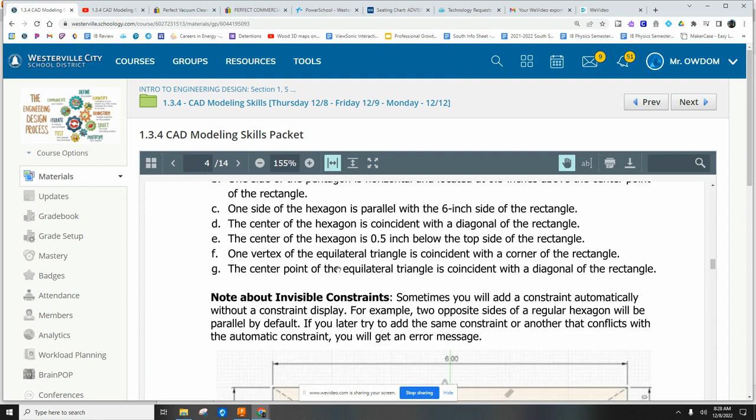So this PDF is the instructions that kind of go through the entire thing. This video will go through page 1, page 2, page 3, page 4, page 5, 6, 7, and that's it. So basically the first half.

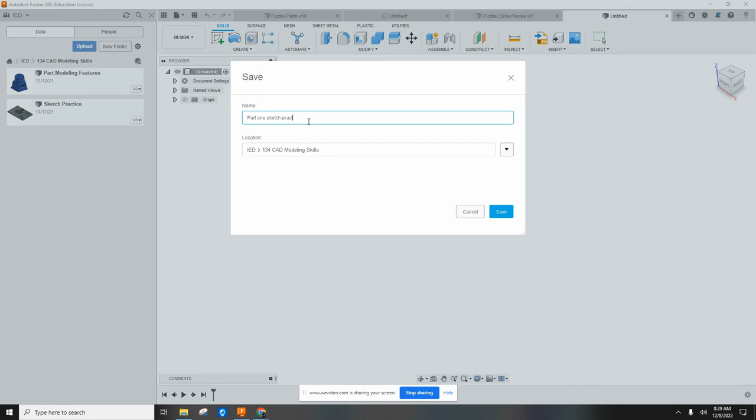All right, so what we're going to do is we're going to go to Fusion. We're going to make a new folder that is 134 CAD modeling skills. Then we are going to make a file in there, and we are going to save it. We can say part 1, sketch practice. All right, so hit save.

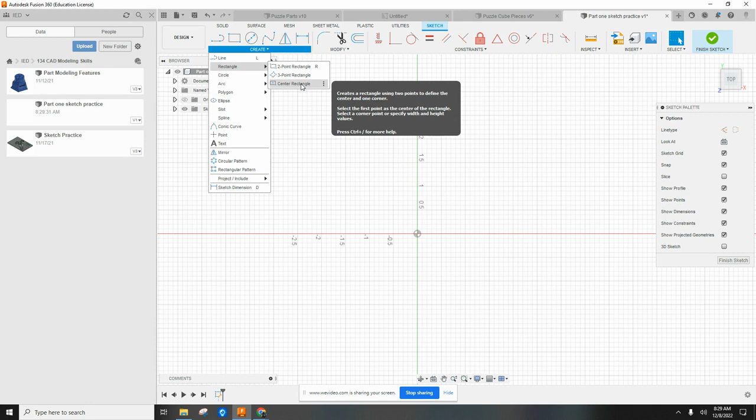All right, so we are going to make a sketch in the middle, and we are going to make a center rectangle. So we go to rectangle, center rectangle, click the origin, bring it out to 6 inches wide, tab 4 inches tall. Enter.

All right, so do not finish sketch. We're going to do a lot of stuff within this sketch. So make sure down here you only have one sketch, and make sure you're within this sketch. Do not make a new sketch, new sketch, new sketch, new sketch, or you might have to redo it.

All right, so now what we are going to do is we are going to make some polygons. So we are going to go to create, and we're going to go to polygon. There's circumscribed, inscribed, and edge. So it all comes down to how they are dimensioned.

So circumscribed, if you see it, basically there is a circle within the polygon, so the dimensioning is to the sides of the polygon. Inscribed is the circle outside - the dimensions measure out to the points of the polygon. Then edge polygon, the dimensions are the sides of the polygon.

All right, so we're going to make a circumscribed polygon. Do not make it on this line, just make it up here. We are going to make it so that it's 0.35, and we are going to hit tab and have a 5-sided polygon. All right, so hit enter.

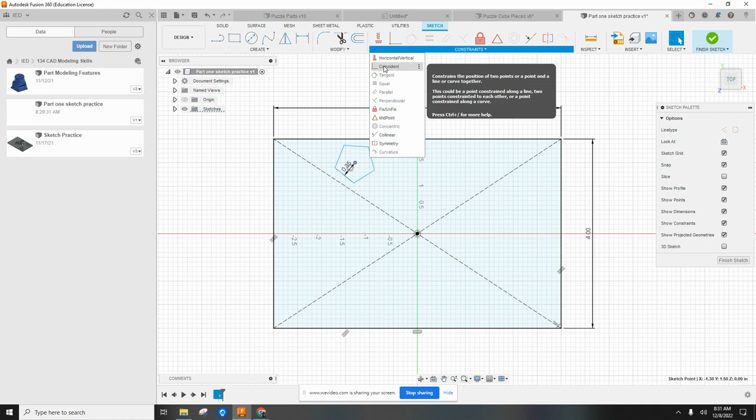All right, so if you, we learned about geometric constraints yesterday, so this should be able to move freely right now. If you made it on this line, this would be connected to this line by a coincident constraint. And if that's the case, we'll have to delete it.

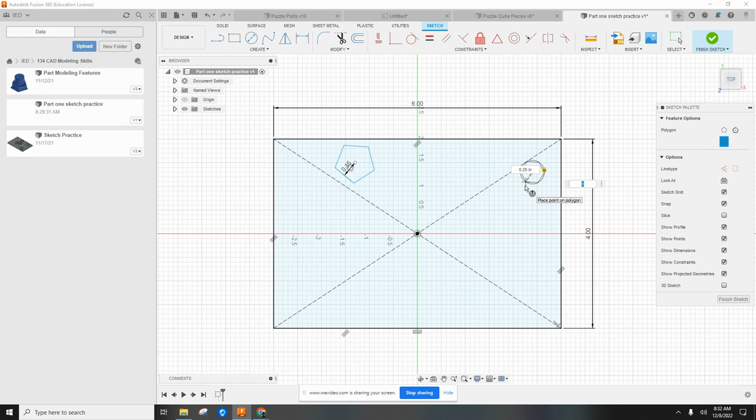All right, so then our next step is to make another polygon. We'll do an inscribed polygon this time. We are, again, not going to put it on this, but we're going to bring it over here. It's going to be 0.25, and it's going to be 6-sided. All right, so we'll hit enter. So I have a 0.35, 0.25.

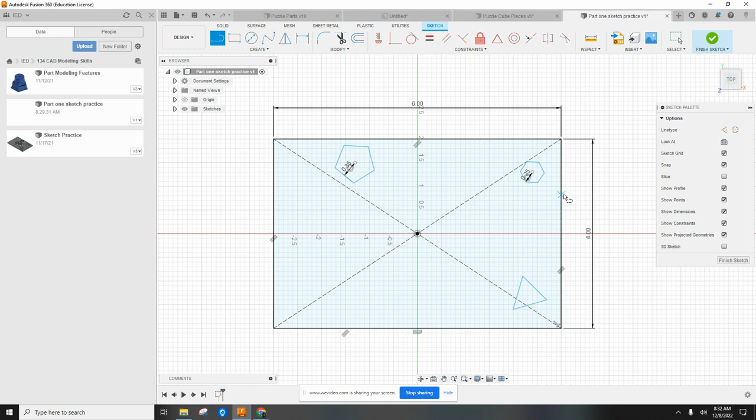Finally, we are going to make a triangle over here. You can just use the line tool if you want. We're going to make a line, line, line. This is a great opportunity to go up and use the equals geometric constraint. We can click, click, and then click, click to make an equilateral triangle.

Then we will go to dimension and make this triangle of 1 inch. So if you're looking in the PDF, there's a slight mistake. In the drawing, it's 1 inch, and then it tells you later that it's 1.25 - it's fine to just make it 1 inch. All right, so make sure you're clicking the right dimension. All right, so something that looks like that.

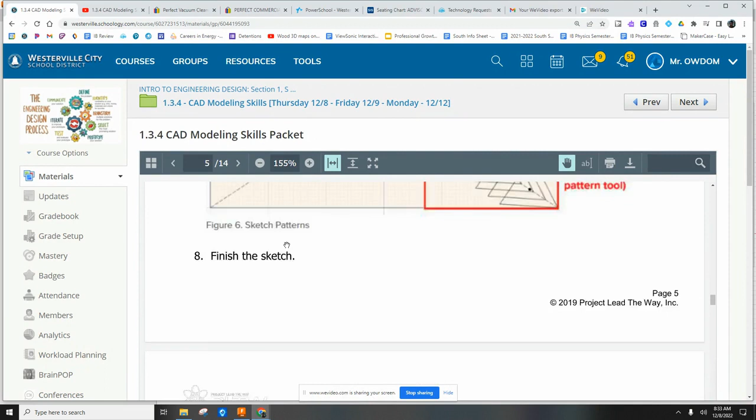All right, so now what we are going to do is we are going to do a decent amount of geometric constraints. So we are on page 4 of the packet. If we look at this packet, we are now on page 4. We've gotten through 3 pages already. All right, so we're basically on to this one. This one by far will take the most amount of time.

All right, so we are going to do A through G right here. We're going to try to read it, try to understand it, and then try to apply it. So the center of the pentagon is on a vertical line through the center of the rectangle. One side of the pentagon is horizontal and located 0.5 inches above the center point of the rectangle. Basically, we're going to have to do at least 2 constraints right here.

So we go over here. We have to attach this to a center line, but notice there is no center line right here. So step 1, within this sketch, we are going to make a center line. Now, useful practice is to realize that we can go over here to construction lines and make our line a construction line. Basically, that will make it dashed, and it will only help with our geometry. It will not allow us to build anything with it.

All right, so we're going to make a vertical line from here to here and a horizontal line from here to here. Okay, now we're going to go up to constraints, and we are going to go to coincident constraints, and we are going to go and click the center of this one and this line. So we know if we have a coincident constraint that forces this dot to be on this line.

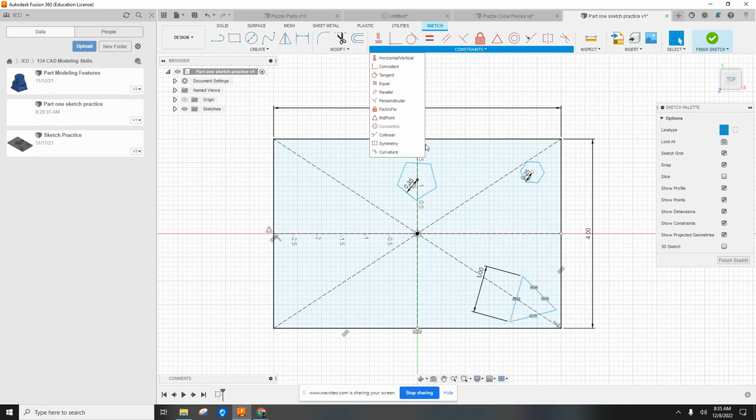All right, so we can try to use the horizontal constraint and see what happens. Remember, horizontal constraints sometimes confuse things, because it's horizontal and vertical, so it might flip. So we'll try. I'm going to click this line and see if it goes to the horizontal. And it did. It worked fine.

If for some reason yours does not, you can hit escape and go in and click that constraint and hit delete. And then what you could do is you could do a parallel constraint with this line and this line, or any horizontal line. And that would force it to become here.

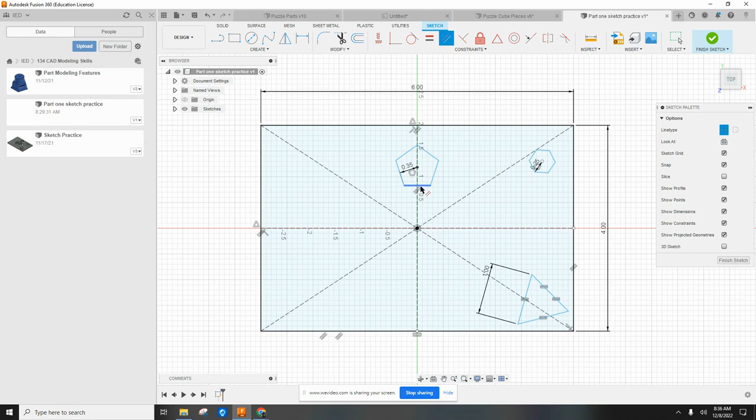So both would work. All right, so now what we have is we have this that can move freely up and down, but it is forced to be in this direction. Last but not least for this shape, we are going to go to dimension, and we are going to dimension this from here to here, and it is going to be a distance of 0.5. So from the center origin to 0.5. All right, we got that one done.

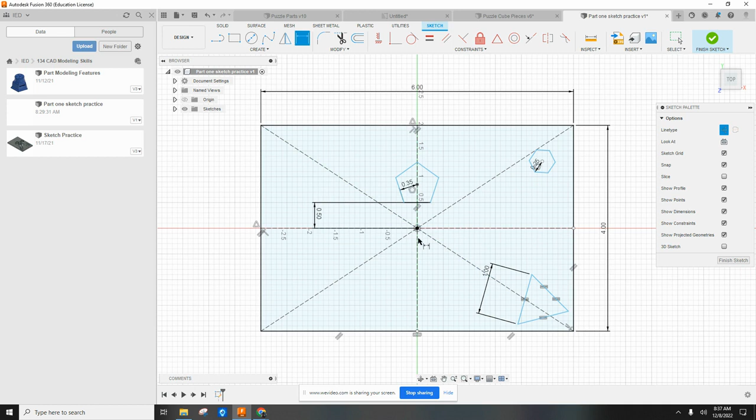All right, so let's look back at our list. We did A and B right there. Now C: one side of the hexagon is parallel with the 6-inch side of the rectangle, and the center of the hexagon is coincident with the diagonal of the rectangle, and the center of the hexagon is 0.5 inches below the top side of the rectangle. All right, so we got 3 things to do here. Okay, so we have this.

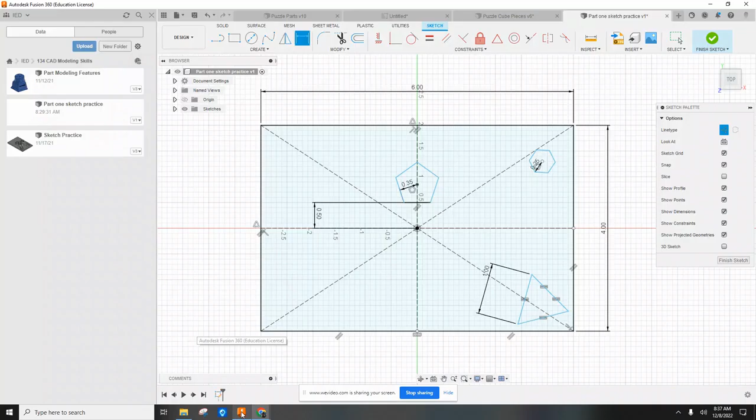We are going to go in and we are going to click parallel, and we're going to click this line and this line. So now we have a side parallel with this. Then we are going to go up to constraints and we are going to hit coincident, and we are going to click this diagonal line and this dot. All right, so now if we hit escape, we should be able to move this up and down, but notice this is parallel with this the entire time, and this slides along here the entire time.

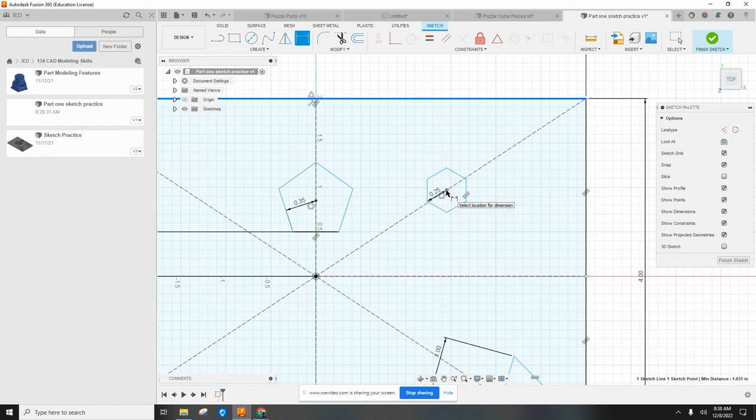All right, so step 3 is the center of the hexagon is 0.5 inches below the top side of the rectangle. All right, so we go back here, we go to the dimension tool and click this line and this line. It is 0.5. All right, so if we do that, that is done. Boom, boom, boom.

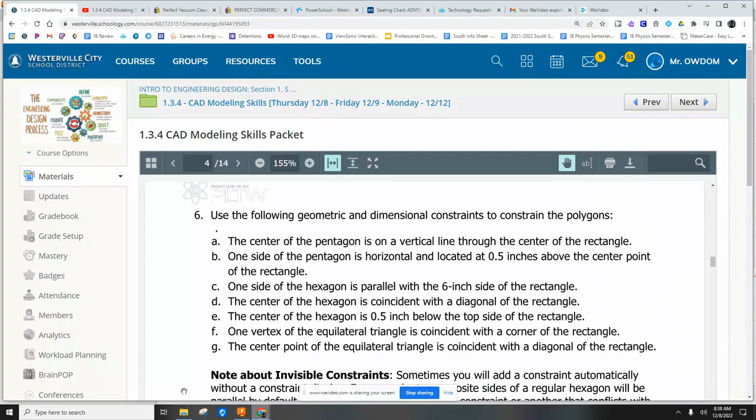All right, now back to our instructions. One vertex of the equilateral triangle is coincident with the corner of the rectangle. The center point of the equilateral triangle is coincident with a diagonal of the rectangle. So we got 2 coincident constraints that we have to do.

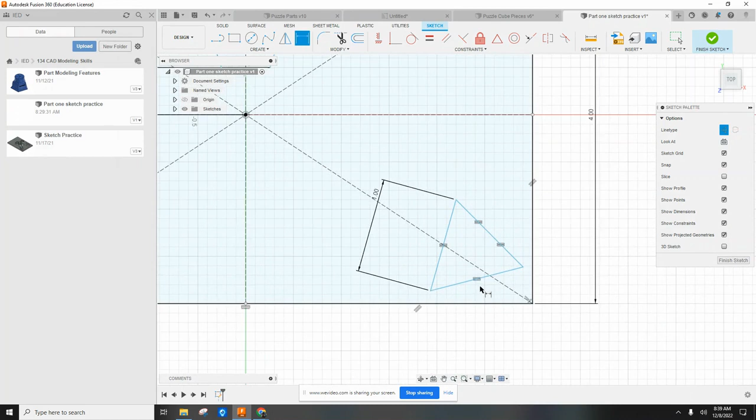So go down to our triangle. Now what we have to do is make a coincident constraint, a point to a point. Then what we want to do is find a midpoint. So we can use the midpoint constraint. We can click this and this.

Oh, it didn't work, I thought it might. So now we can see what we can move here. We'll click escape. Can we move this? We can move this up and down. Other than that, we could make this perpendicular.

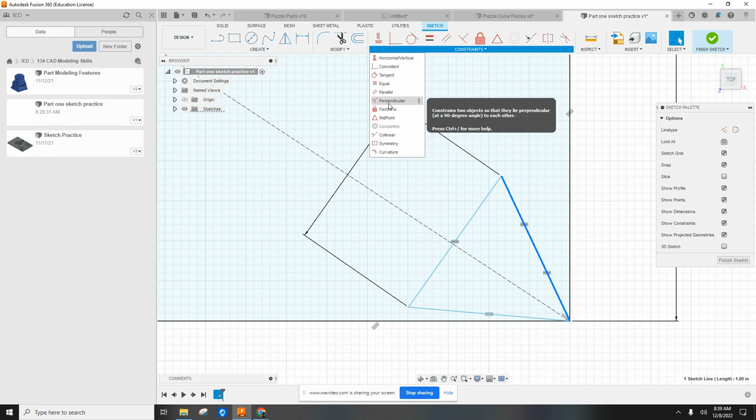So we could click this, Control Z. We could click off. Make this perpendicular to this, and that would be the midpoint right there. So that would be okay. You could click that or that. We could do a lot. There are other ways to do it as well, but that would be fine.

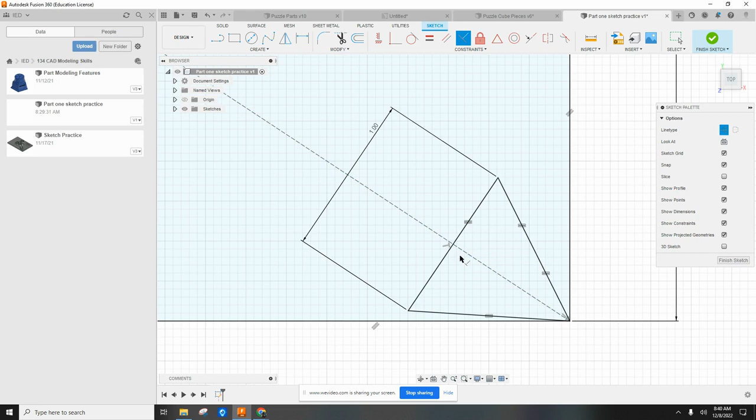So the center point of the equilateral triangle is coincident with the diagonal. Yep, so it should look something like this. So you have this right here, and this right here.

Reflection question: is your sketch fully constrained? How can you tell? If you look at this, if they are all black lines, they are fully constrained. Notice how this, though, is not all black lines, so it is not fully constrained. There are some constraints, but it's not fully constrained.

All right, now we're going to work on the pattern function. We are going to create 3 patterns. We are going to use a rectangular pattern with this, a circular pattern with this, and another rectangular pattern with this. So we are going to go through and estimate these a little bit.

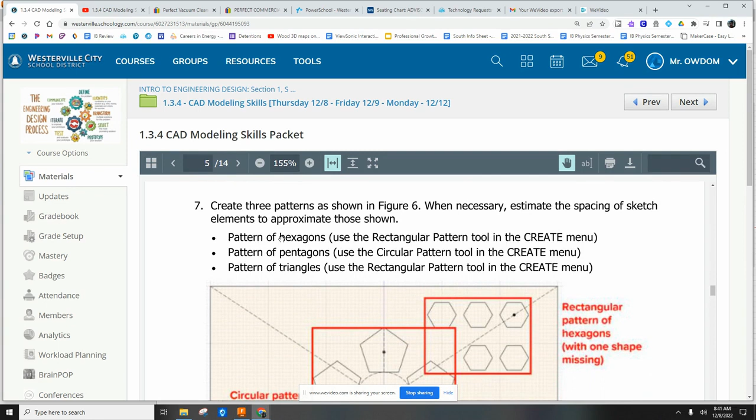So let's go in. We'll do the hexagons first since this one's the first one. I'm going to click escape, then go to create, and go to rectangular pattern. So we are going to highlight this. Now immediately it gives us 2 arrows and asks us what it wants to do. So we are going to grab an arrow, and notice how you can move it over. Since there are 3, if we look at what we're supposed to have a total of 5.

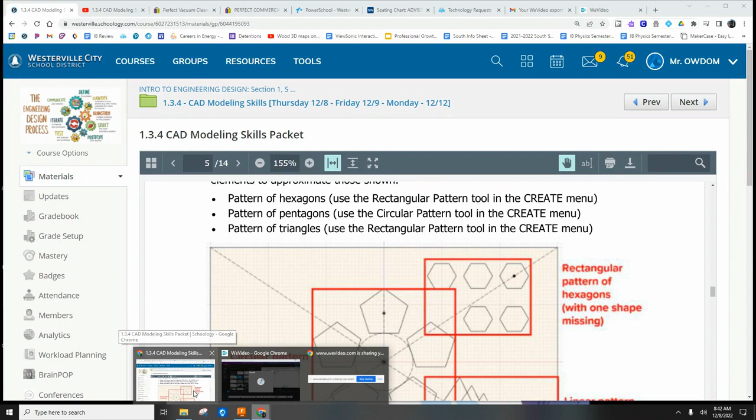So basically what we can do is this, but we don't want 3 there, we want 2. We can move this up, and we can click OK. Then if you wanted to, you could go in and delete this one. So now we have this, and they're patterned after that one.

Then what we need to do is make a circular pattern around this center one. In order to do this, we need to have a circle. So we are going to make a circle out of construction lines, and then pattern this around it. So we got 1, 2, 3, 4, 5. If you go over here, we are going to create a circle that goes right here.

And then we are going to go to create circular pattern. We are going to highlight this one. Now, there are two things you have to select: the object, that, and the center point, and that would be this. Our quantity in this case is 5. So we got that: 1, 2, 3, 4, 5. Done, so this is done.

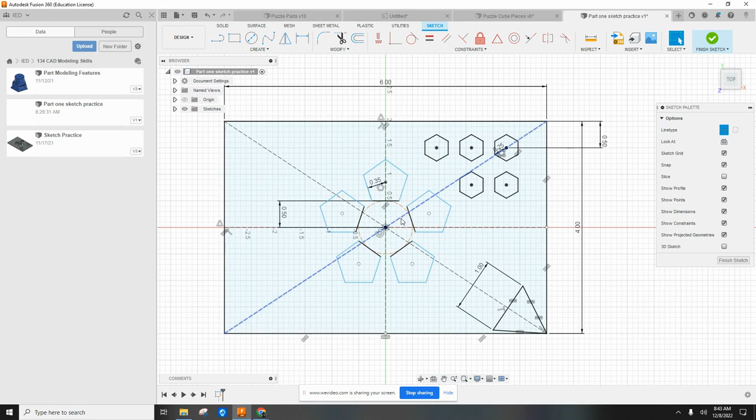This is done. Now we're on to our triangle. So if we look right here, we go 1, 2, 3, 4, 5, 6, 7 triangles along this line.

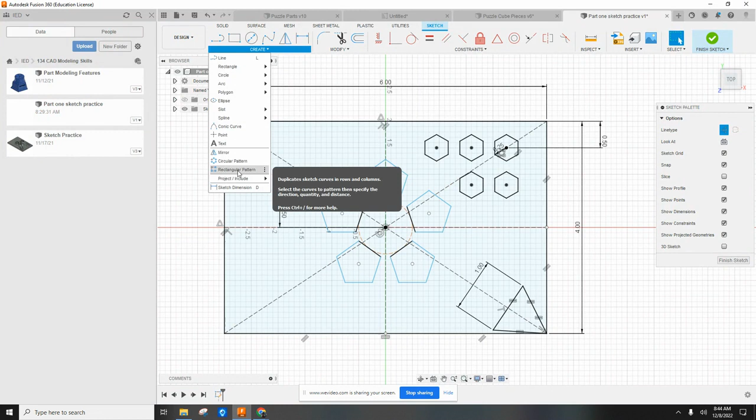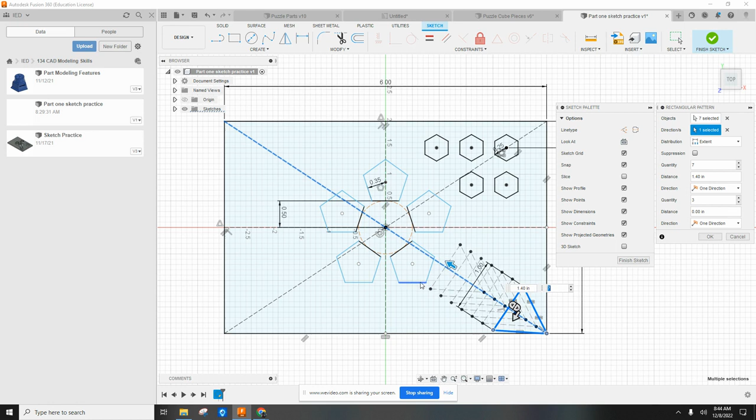All right, so we're going to go to Create, and then Rectangular Pattern. We'll highlight this, and then select the direction along this diagonal line. We have 7, and we'll pull them out to about the right distance. This is approximate, so I'd pull it out enough that it won't overlap this. Then click OK.

All right, so we got all these right here. We got these, and we got these. All right, so now we are going to finish the sketch.

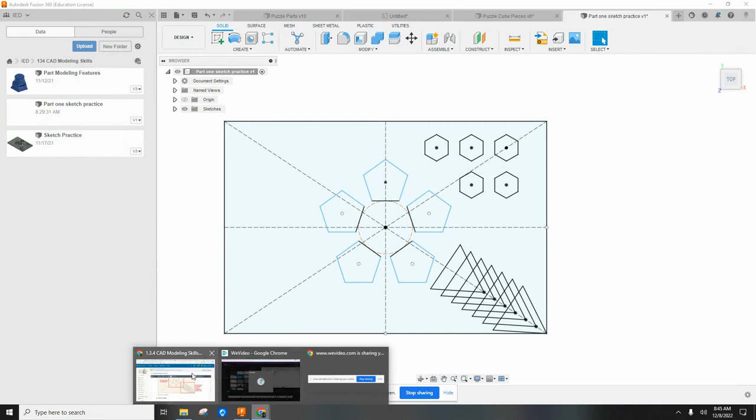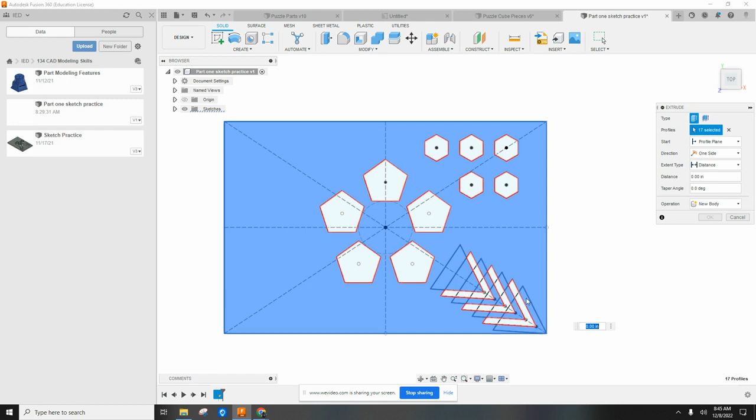Next step, we are going to extrude everything. So 1, 2, 3, 4, 5, 1, 2, 3, 4, 5, but we're only going to extrude 3 of these triangles, or V's I guess. So we'll hit E to extrude and click. Then we click this, then this, then this, and this. I'll probably hit the house just to see how much to extrude it by, but something like that is fine.

All right, so now we have 3 of these. 1, 2, 3. We have 5 of these, 5 of these.

Next step, we are going to project existing geometry. So what we're going to do is click on this surface and make a new sketch, and then basically offset this and extrude it. So we go new sketch on this surface — make sure it's not on the actual plane, it's the surface, see how it highlights?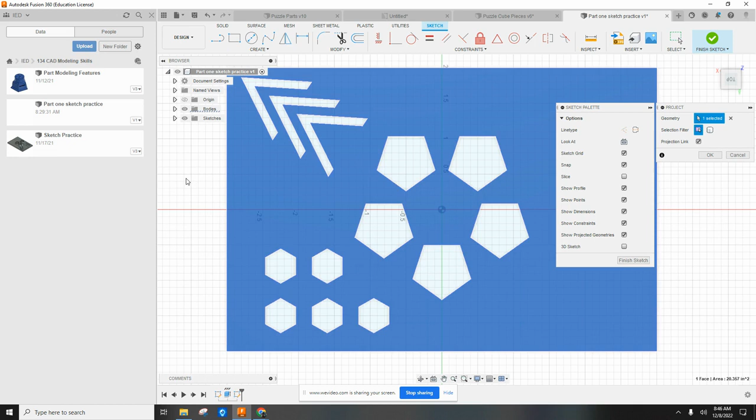All right, now we're going to go to Create and go to Project. It is the letter P — anytime it has a hotkey, that usually means it's pretty important. So project, and we click this, then click OK. See how all these are now purple? That means they were all projected.

All right, so we projected it. Now we are going to take the middle 3 and make an offset of those. So we click on Offset, and click this one. Sometimes it allows you to click both, but in this case it's not letting us. It doesn't really matter the exact amount, we could do 0.05, and click OK.

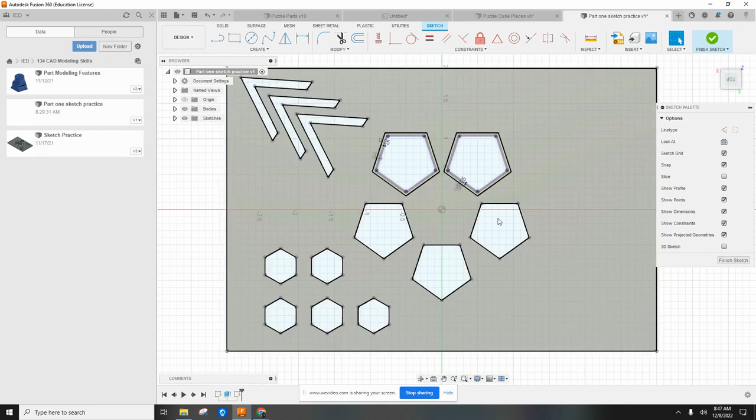All right, and then we'll do the next one, and go out by 0.05. That one's okay. And then we'll do the third one, offset of this one, and go out to 0.05, and then there.

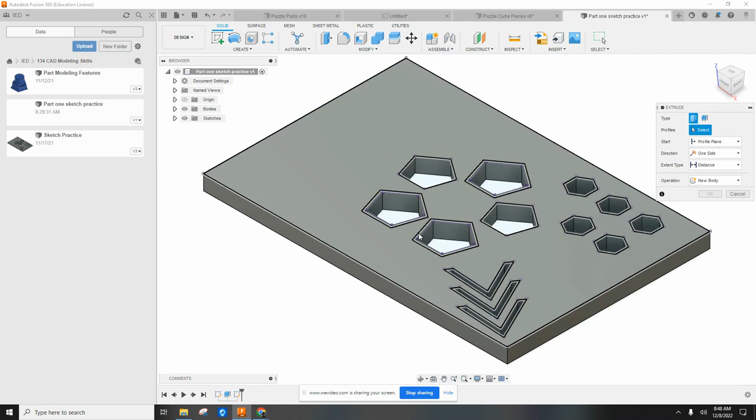All right, then we can finish our sketch and we are going to extrude this, this, and this — extrude those up a little bit. And let's look — that's what it pretty much looks like right there.

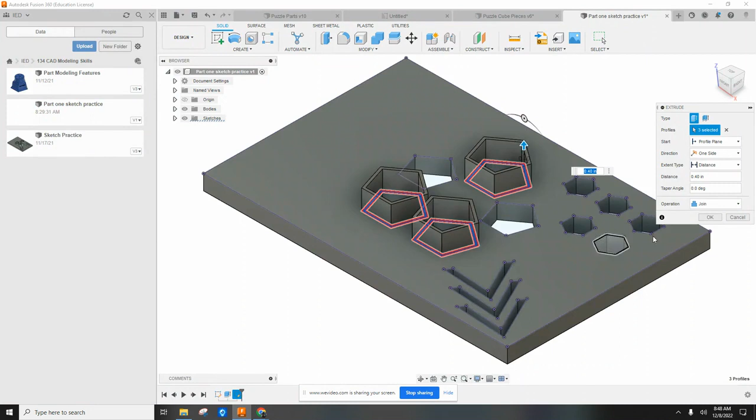Oh, and also to apply a 0.2-inch fillet to the corners of each pentagon. All right, so we can do this now. We go to Fillet and apply 0.2. Let's see if 0.2 looks okay — all right, that's fine.

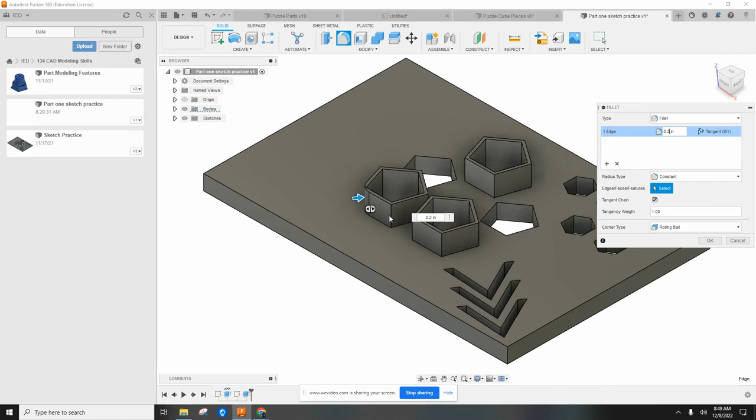All right, and then we'll click that. So then what you can do is try to click each one if you want to, by holding down Shift and clicking each piece.

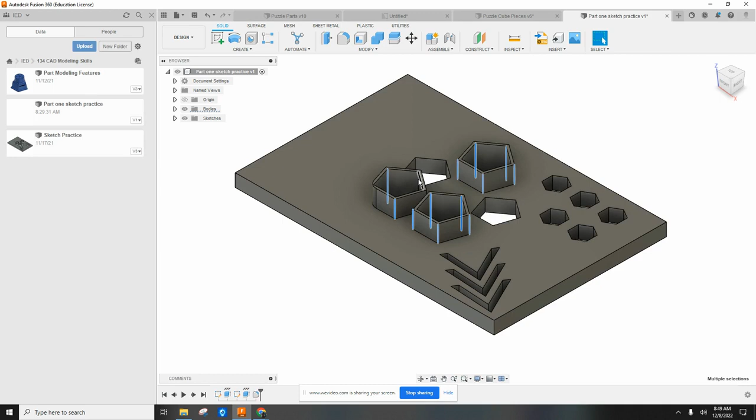Sometimes it's a little tricky to pick each one. I might have picked the inside ones there, but we'll try to fillet and go to 0.2, see what it looks like. Oh, that's most of them — I didn't quite get all of them.

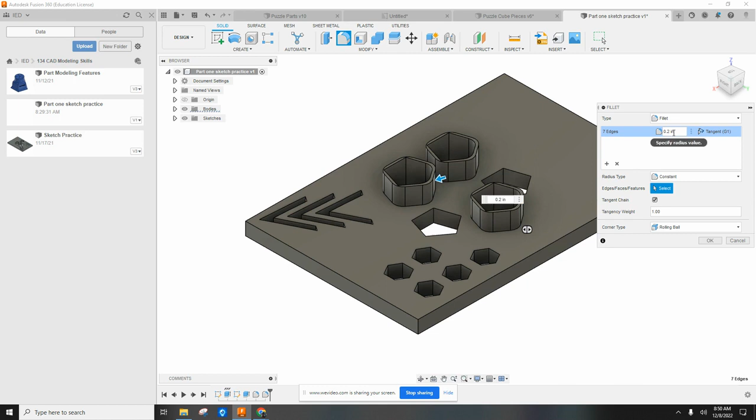So then I would go over here and click this one, hold down Shift, this one, this one, this one, this one, this one, and that one. All right, then hit Fillet and go to 0.2, and we're going to say that's good.

All right, so looking at this, we filleted it and finished the sketch, and that is done with Part 1.